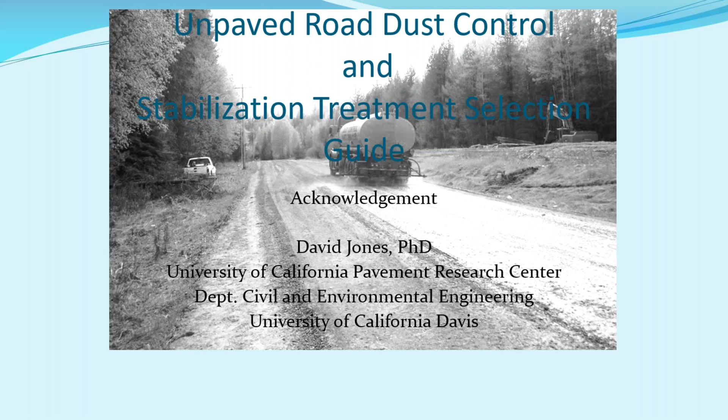This course that we're going through today, of course, is going to be my 3rd of the 4-part series, and today we're going to be talking primarily about grading gravel roads.

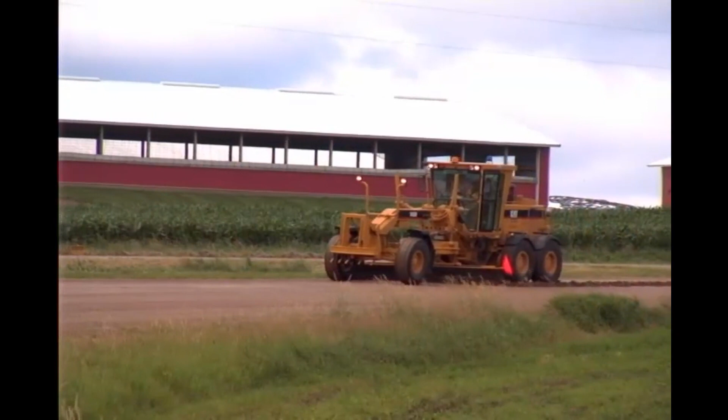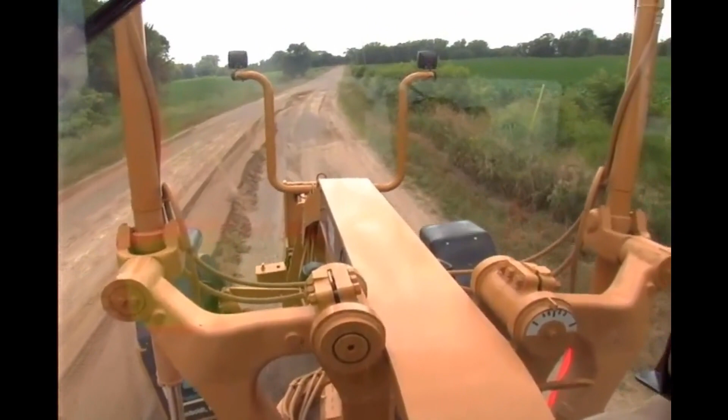I have tremendous respect for skilled motor grader operators who can do a good job of shaping a gravel road. Chances are you'll never have a set of plans or stakes to guide you. It is just your skill to use the levers and operate the machine which produces correct shape. It's a tricky combination of art and science. And gravel roads will go out of shape quickly, sometimes in as little as a week, or sometimes under heavy traffic in as little as a day. It is a tremendous challenge to do a good job of gravel road maintenance. In this section, we'll cover the most important aspects of using your motor grader to shape a gravel road.

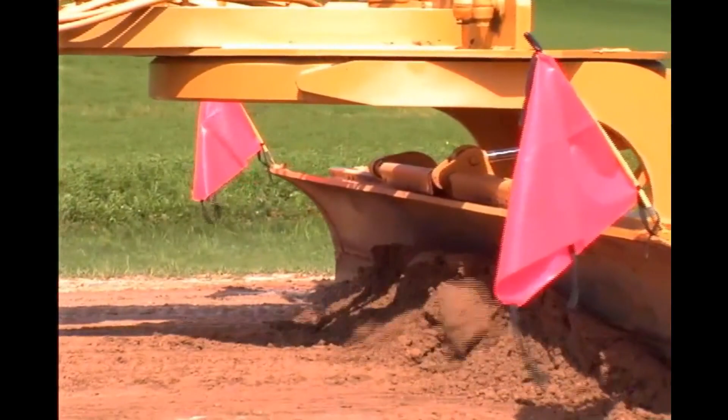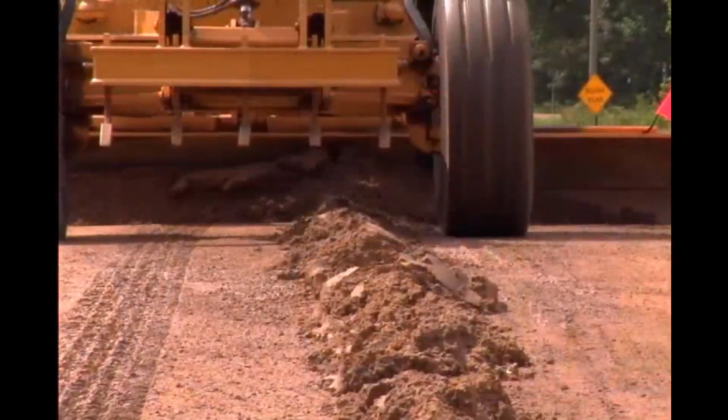The first thing we need to cover is safety, for the operator and for the motoring public. Whenever you're on the road, be sure your warning light is flashing. It's your primary warning to the traveling public. Here's another thing you're required to have: a slow-moving vehicle sign on the rear of your motor grader. Red flags in the sockets at the ends of your moldboard are a good idea too. Also, keep in mind that while using your motor grader, you're a mobile work zone. That means you need to mark the work zone in an approved way. Wear your safety vest, because at times you'll be out of your motor grader walking on the road. Unless the road is closed to traffic, don't leave the work site with windrows on the road. I really can't emphasize safety enough. Be sure to follow all of your agency's rules.

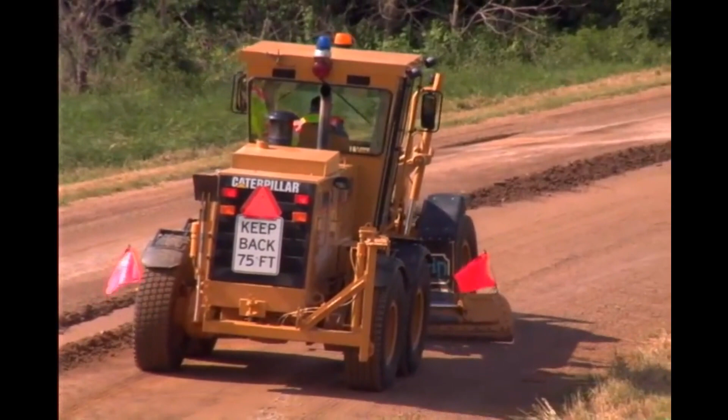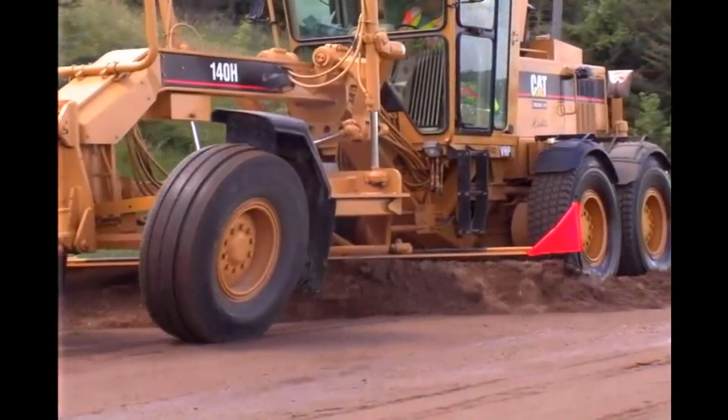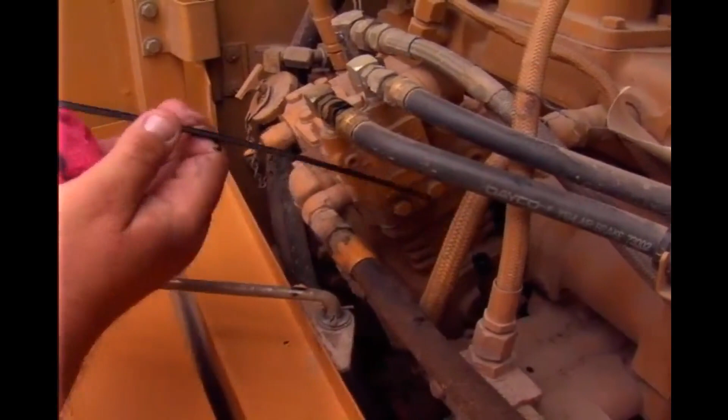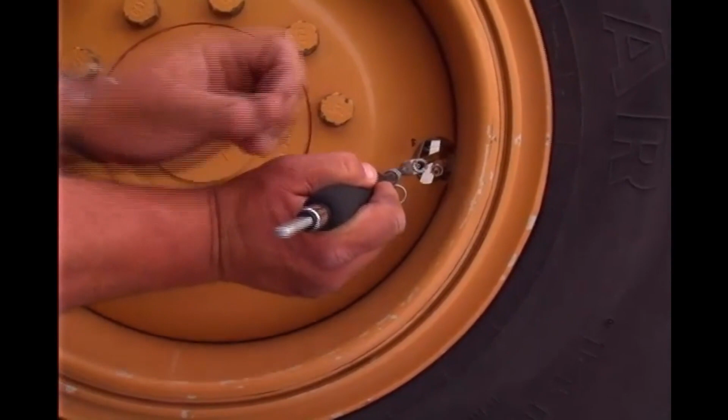The biggest job you will have to do with your motor grader is reshaping the roadway in the spring. Spring is generally the best time because you have less vegetation on the shoulder to deal with, and there is generally more moisture in the gravel, which makes it easier to work, and it will be dust-free. To effectively blend the gravel and reshape the roadway, your motor grader's moldboard has to be in good condition. If the cutting edge is worn in the middle like this, which happens naturally from use, you'll never be able to shape the roadway correctly. So be sure to check the moldboard before you leave the shop. Also, before you leave the shop, be sure to do a thorough service inspection, including checking the tire pressure. Your tires need to be correctly inflated for your motor grader to run smooth and stable. Out on the job, you need to go slow, 3 to 5 miles per hour.

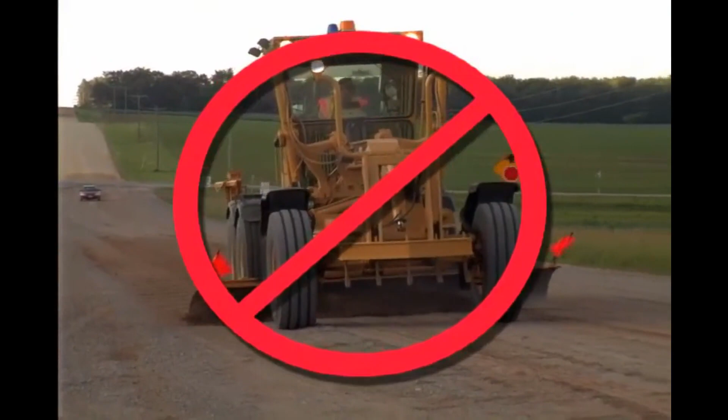Running too fast will cause the machine to lope or bounce, and that will cause washboarding. I'll show you more about washboarding in a few minutes. Reshaping a roadway involves two basic operations: restoring the crown on the roadway and recovering excess material that is accumulated on the shoulders. But you usually perform both of these tasks at the same time.

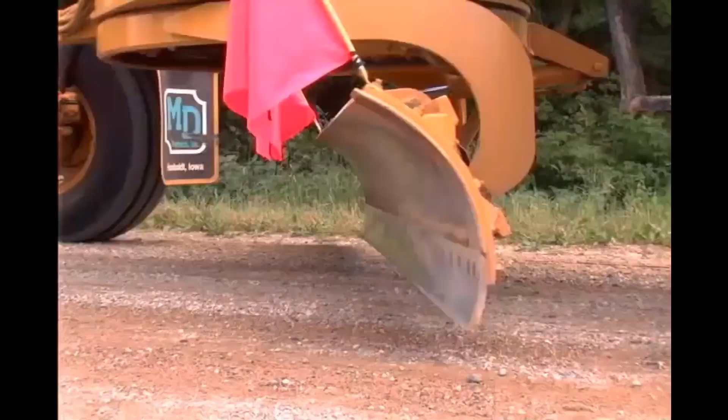When reshaping the road, the orientation of your moldboard to the road surface is critical. First, you need the correct angle, somewhere between 30 and 45 degrees. Too little angle will allow material to spill from the leading edge of the moldboard, called the toe. Too much angle, and you won't be able to blend and move the material properly. You also have to adjust the pitch, or tilt, of your moldboard.

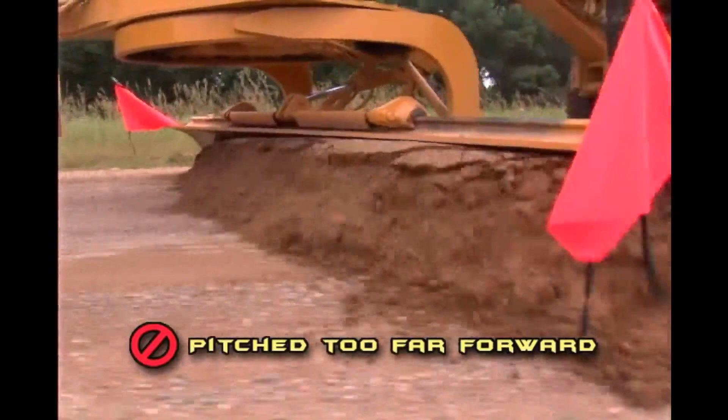If it's pitched back too far, like this, material will build up in front of the moldboard instead of what you want, which is material moving down and discharging at the heel or trailing end of the blade. And if the moldboard is pitched too far forward, the material doesn't roll across the face of the blade and won't mix. Also, this pitch doesn't allow the blade to cut into a hard surface, so you won't be able to trim out little depressions to reshape the road. The blade will just skip along the surface with no real benefit.

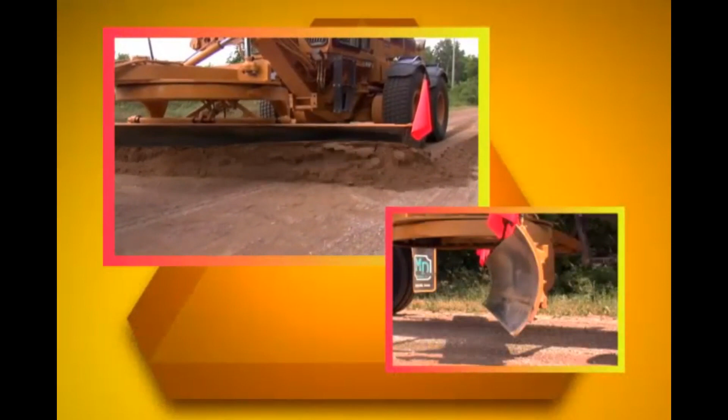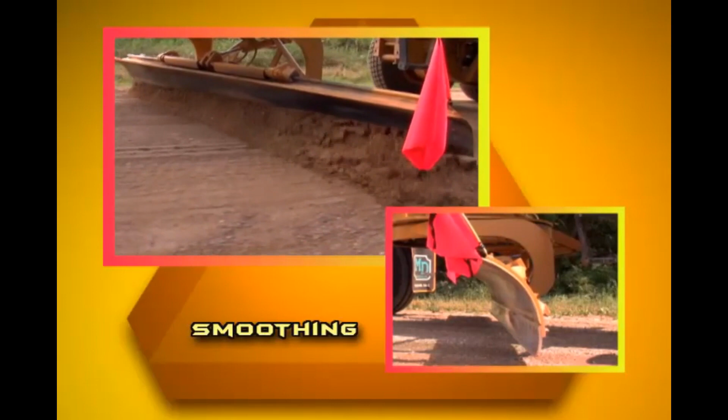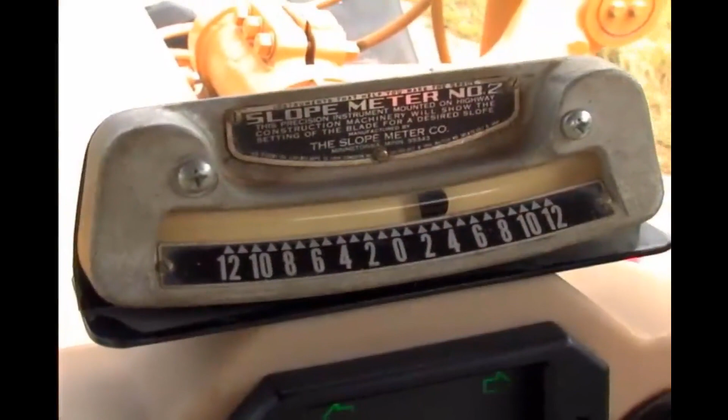The pitch you want depends on what you need to do. To cut in and reshape the surface, you want the moldboard like this. To smooth a road, you want the cutting edge almost at a right angle to the surface, like this. And to spread material, you want the blade somewhere in between those extremes. To be sure you're getting the right crown, keep an eye on your slope meter, or crown gauge. Remember, you want at or near 4%.

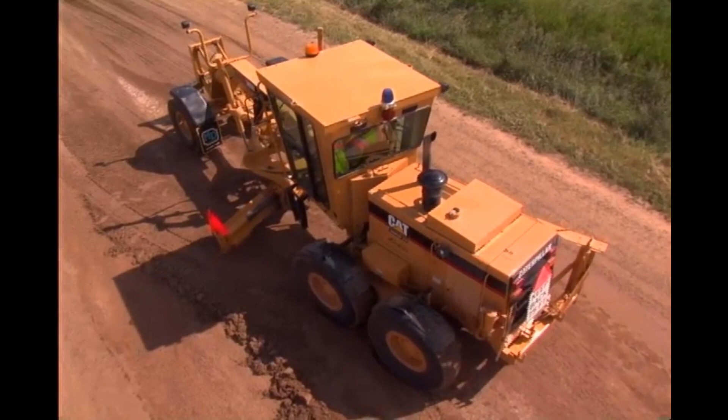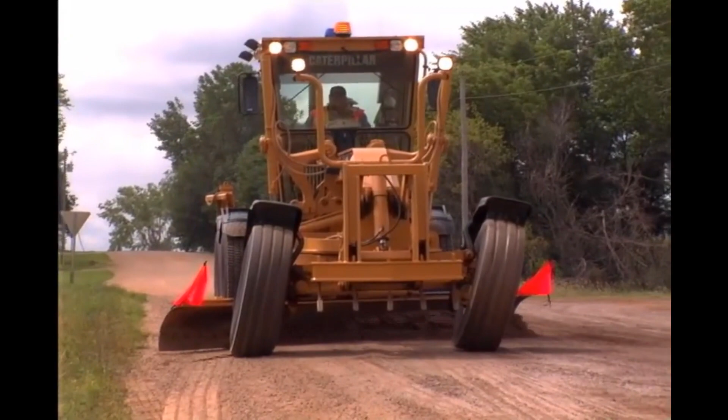While reshaping the road, be sure to take advantage of your motor grader's articulation feature. In other words, the hinge in the middle, which can improve your stability, and it allows you to gain more angle on the moldboard when you're moving a lot of material from the shoulder to the center. You also need to compensate for your motor grader's side drift by leaning the tops of your front wheels in the direction in which you're casting material.

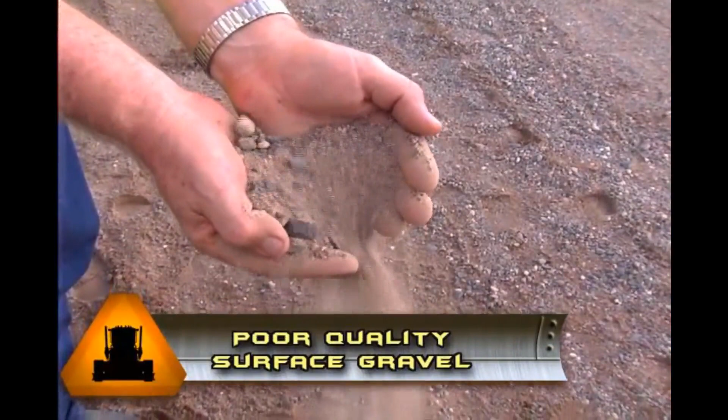As you reshape the surface, you need to get rid of potholes, ruts, and washboarding. Several things cause washboarding. Drivers create it when they brake and then accelerate aggressively at intersections and on hills. But other causes are poor quality surface gravel and lack of moisture in the gravel. And you could cause washboarding by running your motor grader too fast. So keep it down to about 3 to 5 miles per hour. As you use the motor grader, one key to reducing washboarding is to be sure you're blending the surface gravel as you move it.

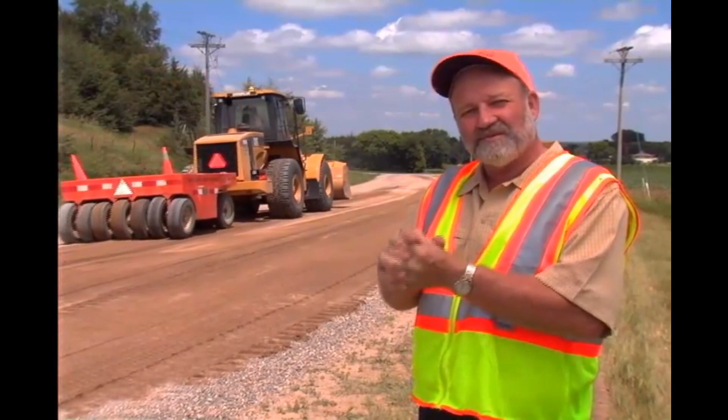After reshaping a roadway or adding fresh gravel, it's best to compact the surface with a roller. That helps bind the stone and the fine material together, and that helps hold the surface in place. You can do a good job with several kinds of rollers. When compacting, it's important to have the right moisture content in the gravel so the material stays in place.

After you've done your major reshaping in the spring, it's important to follow up with routine maintenance during the summer and fall. To keep the road in good condition, use a light trimming action to remove minor surface defects and at the same time move gravel that has accumulated on the shoulder back to the driving surface.

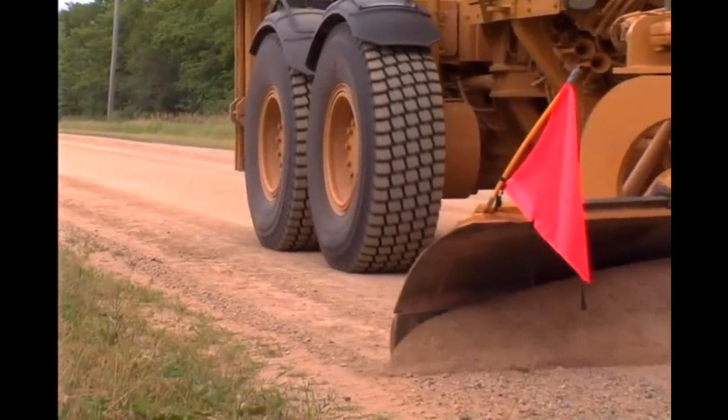Oh, and one last thought about using your motor grader. One thing it can't compensate for is weak subgrade soil. If that's what's causing surface problems, then you will have to improve the subgrade. And that can only be done by removing and replacing subgrade materials or by improving its performance in some other way.

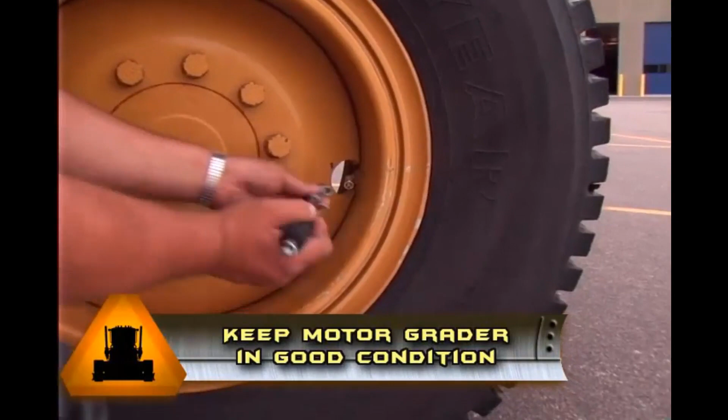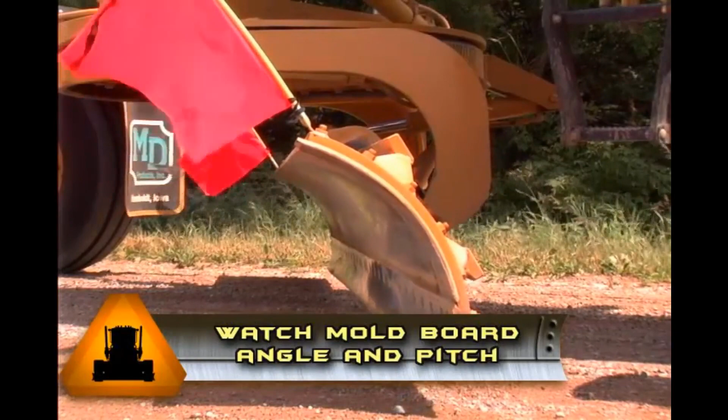Okay, let's review the most important points about using a motor grader. First is safety for you and the public. Keep that in mind always. Next, make sure your motor grader is in good condition before you leave the shop. Go slow to avoid loping or bouncing. Pay close attention to both the angle and the pitch of your moldboard. Use articulation and wheel lean to maintain better control of the machine.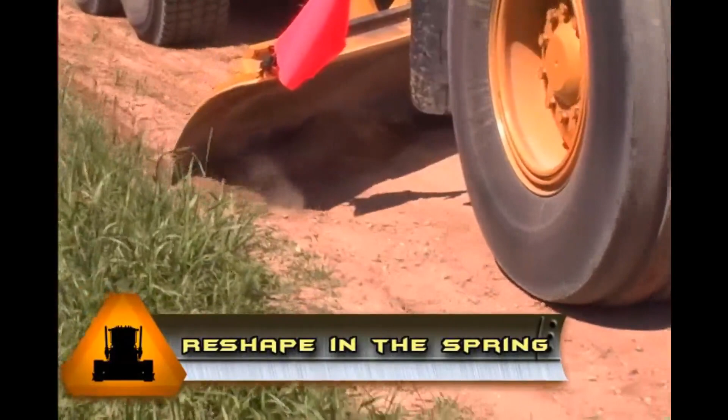Reshape the road in the spring by recovering gravel from the shoulder or ditch and moving it into the center to maintain the approximate 4% crown. Then maintain shape the rest of the year with light blading. Be sure you blend the material as you move it. That helps reduce washboarding, potholes, and rutting. And if possible, after shaping, compact the surface with a roller to keep the gravel in place. And speaking of gravel, the next section will show you what good gravel is and what it isn't.

So like Ken was talking about there in the movie, the main things you need to think about is safety for yourself and the traveling population. Also making sure that your motor grader is in good operating condition and that you go slow whenever you're cutting your surface and you're moving that material.

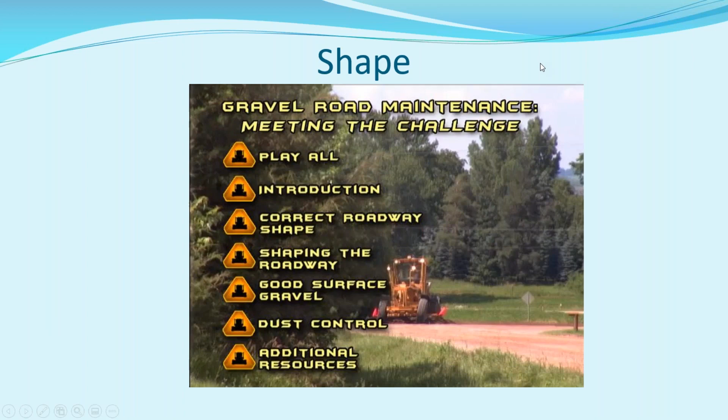The other thing that you need to think about is making sure that the material is wet. Making sure that that moisture is wet so that you don't segregate that aggregate or that gravel as you're moving it around. If you're doing a real light grading, you're probably going to do that as a dry activity.

So if you're in an area that has a crust on that roadway, you don't really want to regrade that roadway because then you're going to break that crust up and you're going to create dust and also segregate your aggregate. So if you need to do some light grading, watch out for those areas that have crusted up and they're hard, because you don't want to break them up and open them up.

And then, of course, intersections, bridge approaches, railroad grade crossings, all those things you need to be able to flatten that grade out so that as you come through that intersection or you come to that railroad grade crossing or that bridge, you match that bridge approach or that grade of that railroad track, which is going to be flat. So you need to adjust your crown at those points.

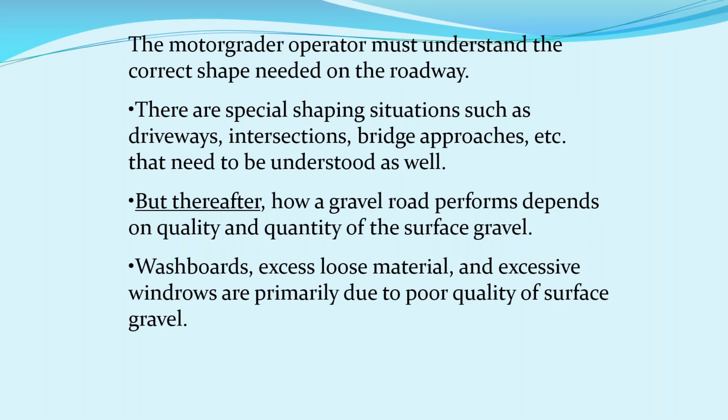Thank you, Victoria. So, of course, what we had talked about last Tuesday, we talked about the shape of that roadway, and that the crown of that roadway needs to be at or very near that 4%. I have some agencies that'll say, oh yeah, well, we go up to 5%, and then as the crown gets beat down, it gets back down to where the water will run off that roadway, because that's what we want that material to be able to do, is to shed that moisture that drops down onto that roadway.

The problem with having a steeper crown, say a 5% or a 6% crown, is that it puts too much pressure on the steering wheel of the driver as they're driving down that roadway. And so what they do is they jump on top of your crown, and that's the reason they beat it down. You ideally do not want that traveling population to be running on your crown. You want them to be running on their proper side of the roadway.

And so like we talked about in the design of that gravel roadway, making sure that you have the correct shape. Here on this screen, I've got a drawing of the correct shape of a gravel roadway. You have your subgrade, your natural material that hopefully has been built up into a 4% crown in the middle of the roadway. And then you've come in and put your gravel road surface material on it, making sure that you have that 4% crown from the center line to the shoulder of the roadway,

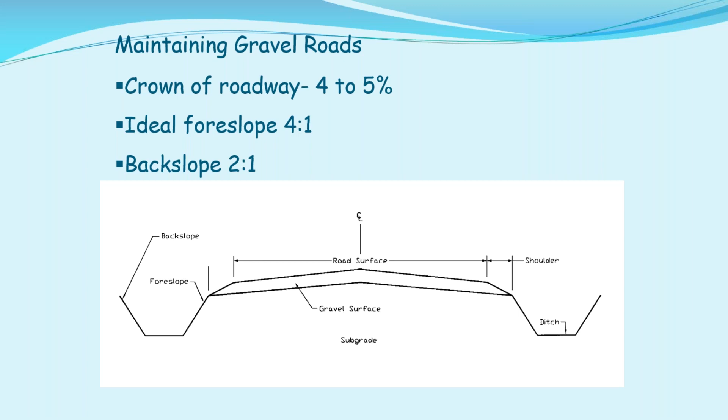So you need to have that a little flatter, a 4-to-1 slope or a 6-to-1 slope or something along those lines, so that when that car accidentally drops off that shoulder, that roadway, if they don't catch it, they'll travel down to the ditch, but they'll stay upright. Instead of on like a 2-to-1 slope, they'll actually roll over, which is a bad situation for the traveling population. So I hope that helps answer that question.

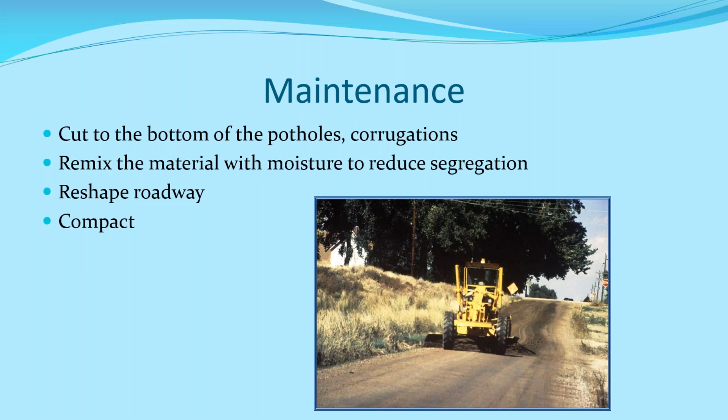So, there's a number of different ways that we compact that material, but you need to make sure that it's moist, it has moisture in it. You cut your road surface slow, and you don't segregate your material as you're dealing with that material on the roadway. So we want to come in and have some sort of compactive measure.

So you take a look at it, and here we've got a little project where we're reshaping the roadway. We have a single drum roller working on that roadway, doing the compaction, and that's normally what you'll see quite often. So compaction is important for every treatment that we do on an unpaved roadway, whether it's just regrading that gravel roadway. Your compaction will make that roadway last longer.

It's going to push that material together so that the cars don't knock it loose and throw it off to the side of the roadway. Also, if you're going to do some sort of stabilization or dust palliative type of treatment, that compaction is very important to lock that material together, hold it together. And the cheapest application you can use to extend the life of that roadway is compaction.

And make sure that you're using the right size roller for the right material and that you properly do your compaction. If you're using the roller here in this picture, the Dynapac with a single drum, and you have vibration going on it, and you're running it at 7-8 miles an hour, you can actually create bumps in your roadway because of where your compaction is taking place in that roller.

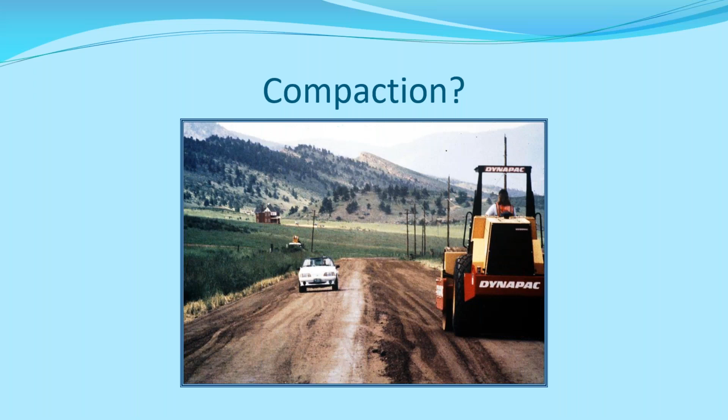The steel drum roller I showed you earlier, there's actually 2 versions of it. There's a single drum roller that I showed you in the picture. If we go back here, this one's a single drum steel roller, and that's what you'll normally see a lot on the unpaved road surfaces. A double drum steel roller you'd see when you're doing compaction on asphalts. So generally speaking, on an unpaved roadway, you'll be using a single drum steel roller.

The other type of roller that you see quite often on unpaved roadways is the pneumatic roller. You may see it as a roller itself, or you may see a pneumatic roller in what they call the pull behind types of rollers for graders, where you can lift them up off of the back of the grader. They're attached to where your scarifier is, and you can pick it up and then set it back down onto the roadway and use the weight of the grader to aid in your compaction.

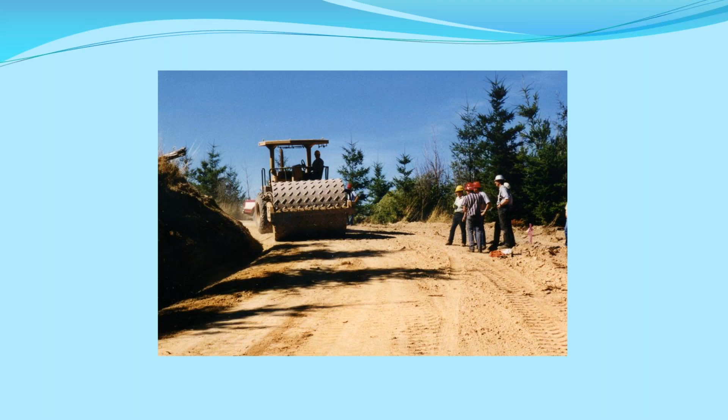Now in some cases, I've actually had agencies that come in and they use a loaded water truck. Any type of compaction is better than none at all. But by the same token, the issue that I see with a water truck is, generally speaking, you have to run that water truck up and down that roadway quite a number of times to really get a good compaction. And it's very difficult to also do your compaction when that motor grader is cutting that roadway with that water truck.

And so I prefer to see an agency use what is called a rock and roll, where the rollers are attached to the grader. You pick them up when you're turning around, but you can set them back on the ground when you're cutting, when you're laying your material out. Those are an ideal situation, or an independent roller.

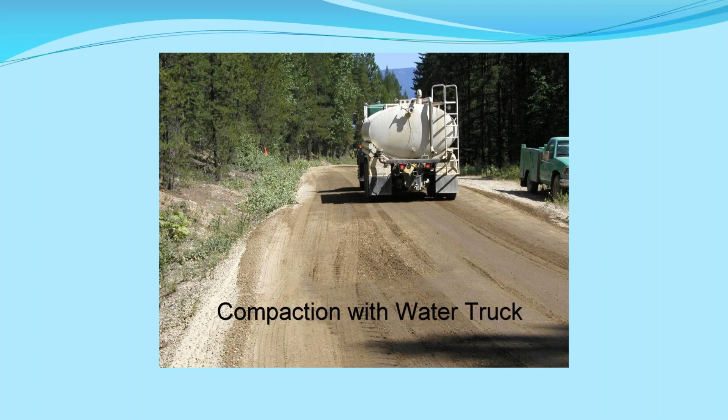Now, in a number of different jobs that I've worked on for different counties here in the state of Idaho and around the United States, this is an ideal situation where you have a motor grader with a set of rock and rolls on it, so they're able to put them on the ground, and when they're cutting or laying, they're able to do some compaction. They have a water truck here where they can keep the material moist, so you're not going to segregate your material. They have a secondary roller. It's a single drum vibratory roller that they can run on the surface to compact that surface.

And then, of course, they have a maintenance truck so that they can have fuel, extra fuel, and other maintenance types of activities as they need them. And so this would be an ideal situation for any entity.

Now, what happens sometimes is that, in the summer months or later on in the year, after you've taken and reshaped your roadway and got it all shaped up, you'll start getting some complaints about maybe some potholes or some washboards or those types of things. And like I said earlier, if you look at that roadway and it has a good crust, the materials all still bound together and held together,

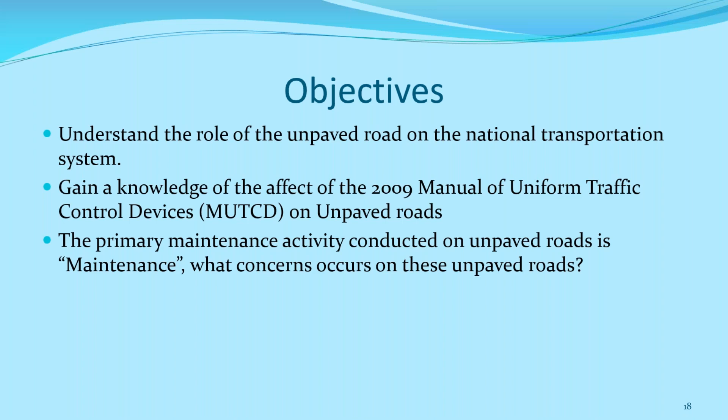So, nationally, unpaved roads account for 1/3 of the federal and local transportation systems. These roadways typically serve less than 3,000 vehicles a day. Like I talked about in the management section, I like to see an agency having a management plan for all their road system, their paved roadways, their unpaved roadways, their dirt roadways, and then as the number of vehicles increases on those types of roadways, there may be a change in that roadway.

As an unpaved roadway gets up over 200 vehicles a day, it gets to the point where your maintenance costs are going to overrun your ability to perform on that roadway. So you may need to pave it, or you may need to put in a stabilizer. You may need to do something else. But we do have some unpaved roadways that have 3,000 vehicles a day, and most of those are generally a stabilized type of roadway. And we'll talk about that. That's actually the last part of my segment on Thursday, taking a look at those stabilizers, those products that we're going to use.

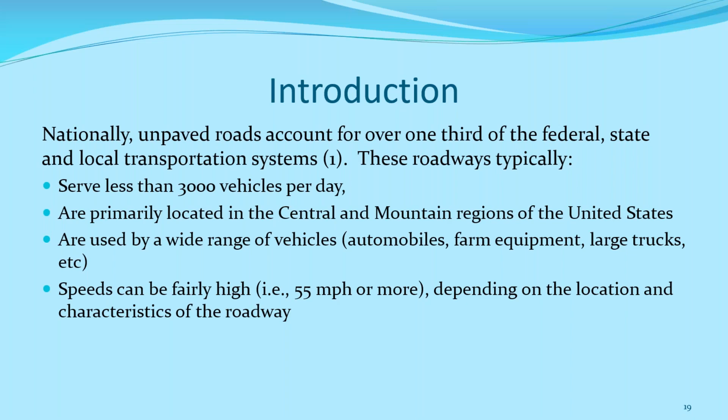And speeds can be fairly high. Generally speaking, you see an unpaved roadway, and if it's a nice roadway and it has a good gravel surface, you might see speeds well over 55 miles an hour. And that creates problems in itself, as far as deterioration of the road and also creating problems in the roadway.

So our unpaved roadways have a large variety of traffic, a large variety of surface types, but the main thing that we need to take a look at is making sure that the surface of our roadway is going to be able to be maintained by that motor grader in a condition where we're not segregating our aggregate or leaving berms in our roadway that people are going to have problems or situations with.

And then on a paved roadway, you may have some traffic control devices, you may have your taper, and you'll have other traffic control devices to guide the traveling population by you. But on an unpaved roadway, we don't generally, as an industry, use that many traffic control devices. And I'll tell you right now, in the MUTCD, unpaved roadway is only mentioned once in that entire manual, and that's under Part 5 in the introduction.

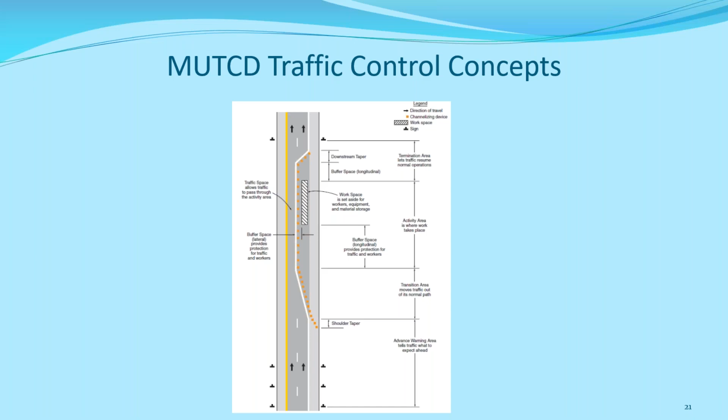And so when we took a look at what type of traffic control we need for that unpaved roadway, we went to Minnesota and a couple of different states that had information about unpaved roadways and traffic control. What we found, generally speaking, is that when maintaining an unpaved roadway, the organization needs to consider the width and the length of the work area, the visibility of the equipment, and the berm. As you're cutting material off that roadway and taking it towards the center line, how tall is that berm?

Is that motor grader, that roller, that water truck, all those pieces of equipment, are they visible on that roadway? One of the things I find, especially with the motor grader, is if you only have a motor grader out on the roadway, as it's cutting and the traveling population comes down that cut roadway, it gets very dusty, and people may not be able to see that motor grader. So I'd like to have water for visibility also, to control that dust from those vehicles.

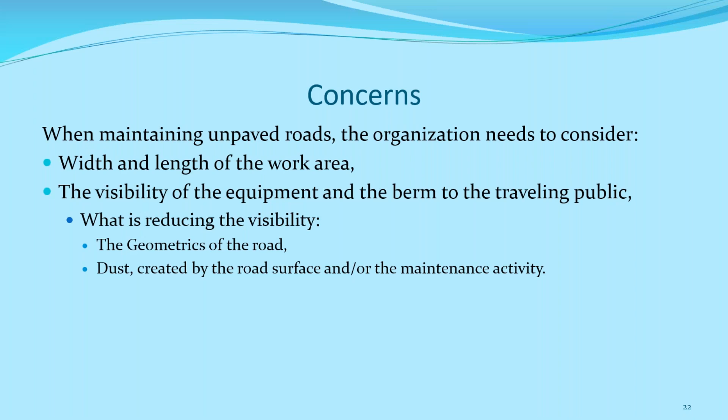So with all that equipment out on the roadway, generally you'll have a roller and a grader working out there. All that equipment needs to have their flashing yellow lights on, their hazard warning lights on, and a slow moving vehicle sign, especially on the motor grader or the roller. And you may need to put out a road work ahead sign.

So when you look at some of the concerns, the direction of the equipment, we talked about that last Tuesday: if you continually pull your material in one direction, you're going to drag your material out and stretch it out, and it's going to cause you problems. So there may be times that you have to work against the flow of traffic. So you need to make sure that traveling population is aware that you're out there, that your berm size is not a hazard, or if it is, let them know that berm's out there. And the way we do that is by putting out a road work ahead sign.

What I tell a lot of people I work with is that as I'm going out and starting to cut a section of roadway, I like to drop a road work ahead sign off on the shoulder of the roadway just behind where I'm going to start cutting, and when I get ready to turn around and make my other cut, I'll stop and put another road work ahead sign for the opposing traffic on the opposite side of the roadway. So you're protected by those two. You notify that traveling population that you're out there on that roadway.

So an activity area for an unpaved roadway is located between the first point where the motor grader cuts the road surface or the road surface is changed to the point where the traffic is returned to the normal roadway before any modification or changes by that maintenance activity.

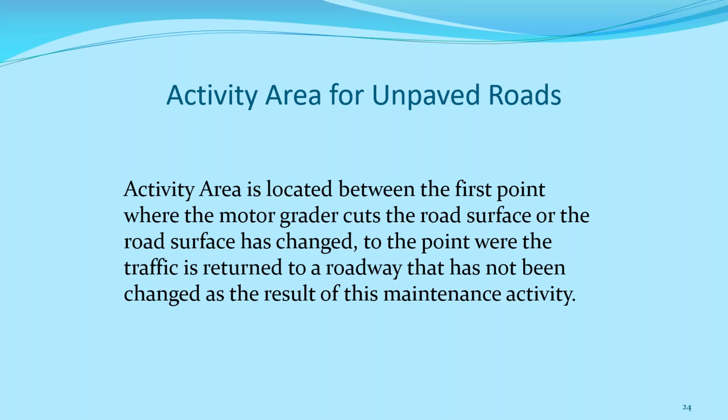And you think about going 3 to 4 miles an hour, cutting a gravel road surface, and you cut a mile of it, you're not going to be done with that section of roadway in 5 or 10 minutes. You're going to generally take an hour or maybe a little longer, depending upon how much compaction and how much water and all the other things you're doing. So that activity area, you're doing a lot of things in that activity area. So you need to let that traveling population know you're out there.

Even when you're light grading, your berm is generally small enough that it can be traversable by a vehicle that crosses that berm. But by the same token, especially with light grading, if you don't use water, you're going to have a lot more dust, and it's going to be harder to see your piece of equipment. So I recommend that you think about making sure that you put out roadwork signs and those types of signs whenever you're out there working on that roadway, dealing with that roadway surface.

Now, of course, when you're reshaping a roadway and you're getting a major berm where it's going to cause major problems with the traveling population, especially if you're set up on a grid system where every mile you have an intersection on your roadways, you may actually take a look at closing that segment of roadway that you're going to be doing that major reshaping on. Or in some cases, you may actually decide to put out a flagger and control that traffic so that traffic slows down. They don't hit that berm doing 55, 60 miles an hour. They don't have those issues with that work area.

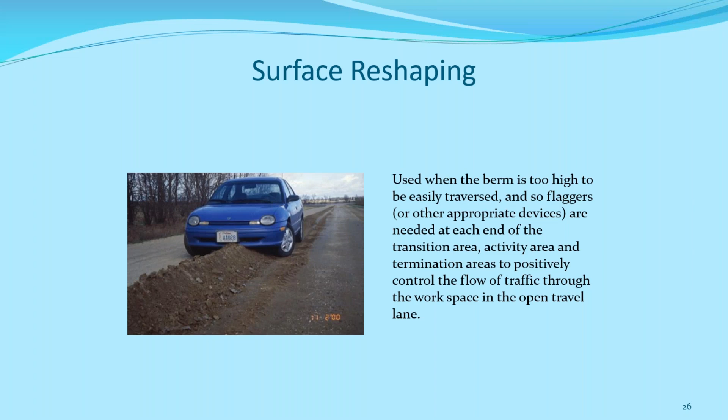And hopefully that's answered your question as far as the aggregate size: the traffic determines the aggregate size. For the elevation change, making sure that you have the right gradation is what will improve that roadway for that elevation change.

Now, we do have times that we actually go out there and do a major rehabilitation on that roadway. We're maybe hauling material out onto that roadway and increasing the amount of aggregate, or we may be out there pulling the shoulders and the ditches and reshaping that entire roadway. In those types of situations, generally speaking, we'll close that roadway so that the traveling population doesn't get mixed up with all the larger berms and the large pieces of equipment. And of course, in that situation, we need to set up a detour.

Victoria, if I could ask real quick, do you have some of the gravel unpaved roadway guidance books there at your center? I believe we do, and if they drop me an email, I'll be happy to make sure we get copies out to them if they're interested in it. Yeah, because that was the guidance document that was developed as part of FHWA and ARTBA's agreement to look at unpaved road issues as far as work zone traffic control.

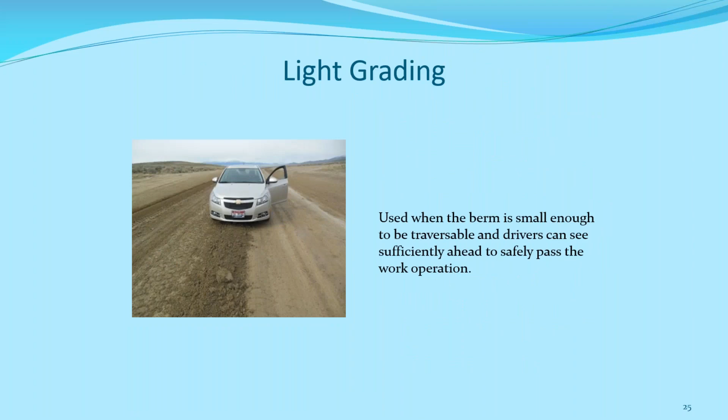This is a farming community out in the desert part of Idaho, and virtually all the ground here that they're farming is irrigated. And the highway district that owns these roadways out in this part of the country has worked out an agreement with the farmers, since it's all irrigated by pressurized irrigation systems. They actually put in a stub where their water line goes close to the roadway so that the highway district can pull water out of their pressurized irrigation system and use water to grade their roadway.

The benefit to the highway district is they're able to have the water to be able to grade with. The benefit to the landowner is that they're able to see their roadways lasting longer. So they see a real benefit in being able to provide that water to that highway district. The benefit works out really well for both of these organizations. And we're going to talk about it on Thursday quite extensively.

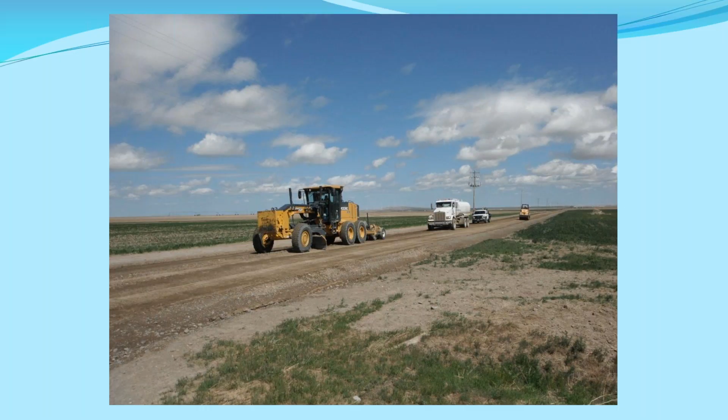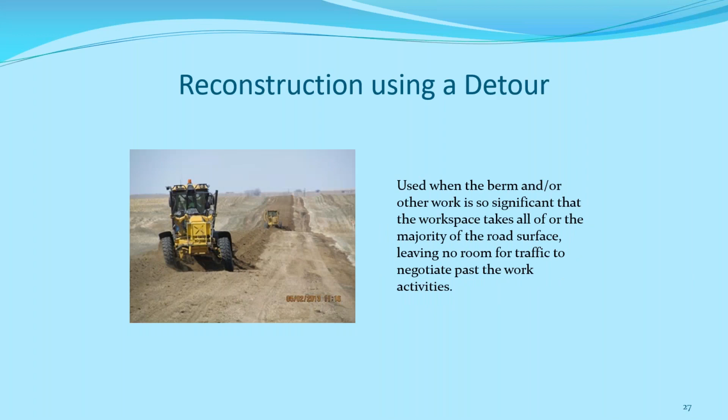This was a project that we were getting ready for a stabilization type of activity. We actually used a mag chloride on this roadway to stabilize that roadway and be able to hold that material in place. So those are generally the points and the pieces of information that I wanted to share in this part of my presentation. Thursday, we have, yes.

Sorry to interrupt. There is a question that just came in. Someone would like to know what mag chloride is. Okay. Well, that brings me right up to where I was going to go, is that on Thursday, the last part of this 4-part series, we're going to be talking about stabilizers. And in that conversation, we're going to be primarily looking at the different types of stabilizers.

When you look at a stabilizer, there's well over 300 different name brands of stabilizers. But generally speaking, there's only 5 families that encompass all 300 brands of stabilizer. And mag chloride is one of those types. It's actually a salt. Sodium chloride, mag chloride, and calcium chloride are the 3 primary salts that are used in stabilization. And magnesium chloride is a combination of magnesium and then the chloride.

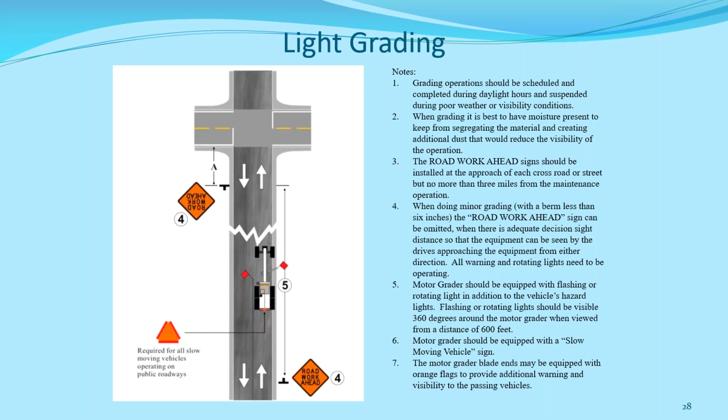And it's a stabilizer because it's very hygroscopic. It'll attract water to itself. And so it's used pretty extensively, especially in areas around the Great Salt Lake. They use a lot of the mag chloride type of stabilizers because of the access to that type of chemical. So next Thursday, we're going to be talking about those stabilizers.

What are the families? What should you look at when you have somebody approach you and say, hey, I've got a great product here and it's going to help you with your roadway? Does it really help you with the roadway, or is it just a waste product they're trying to get rid of? We've seen that happen a number of different times where we have a waste product that doesn't help our roadway, and in some cases actually creates problems in our roadway.

And so if you're going to be using some stabilizers, you need to think about what type of stabilizer, what type of roadway do you have, and what type of maintenance do you want to do on that roadway. I was involved with one company that developed a stabilizer that they used up in Alaska on some of the remote runways to stabilize that runway.

And with that chemical type of treatment, they were only going to be able to do it once and then expect it to last 20 or 30 years. And some of them work out really well and others maybe not so much. So what we're going to be talking about on Thursday is all about those stabilizers. So if you want more information about the stabilizers, the different families, some of the brand names, we'll talk about that on Thursday.